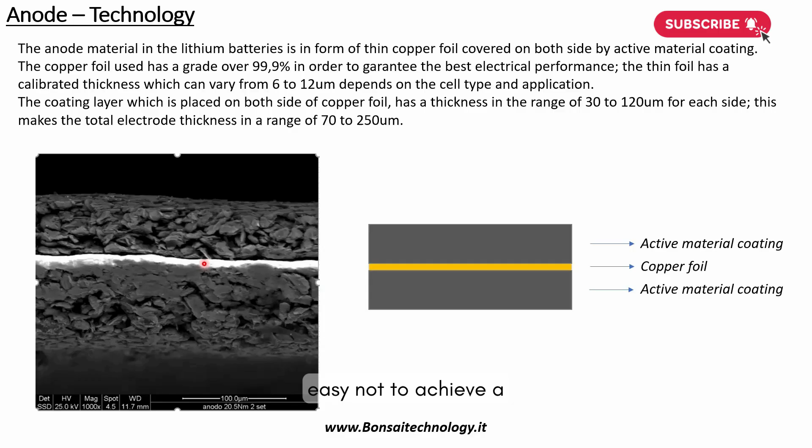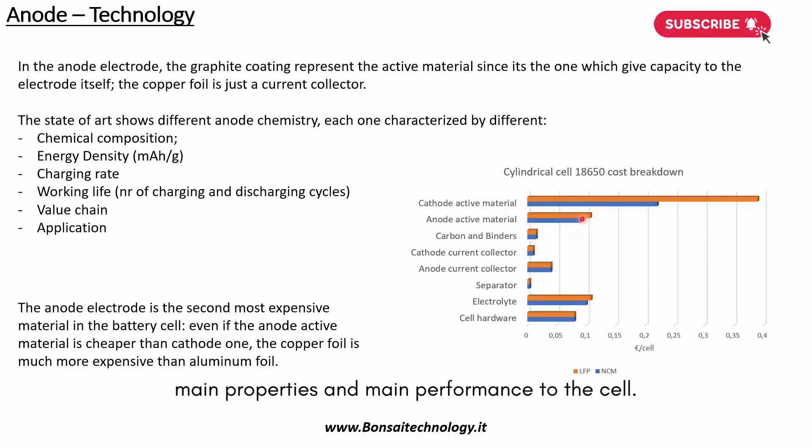The same that we said for the cathode still applies to the anode. So even for the anode, the main KPIs or main features are represented by the chemical composition, the energy density, the charging rate, working life, value chain, and application. As you can see, the anode represents the second most expensive material in the battery cell, and the anode with the cathode are the two materials that give the main properties and main performance to the cell.

So how does the anode work? In the beginning it seems difficult to understand, but it is really, really easy. As you know, the graphite structure is defined by basal planes. The graphite has a hexagonal reticulum arranged in a plane, so the graphite is composed of a stack of planes where the atoms lay on each plane.

So during the charging and discharging of the batteries, the lithium ion moves between the basal planes - the lithium ions are moving from plane A to plane B. And this increases the volume of the active material in the anode. The increasing volume creates many effects inside the battery cell once it's operating, because if there is no empty volume inside the case of the battery and the anode during the charging phase is increasing its volume, that means even the internal pressure increases.

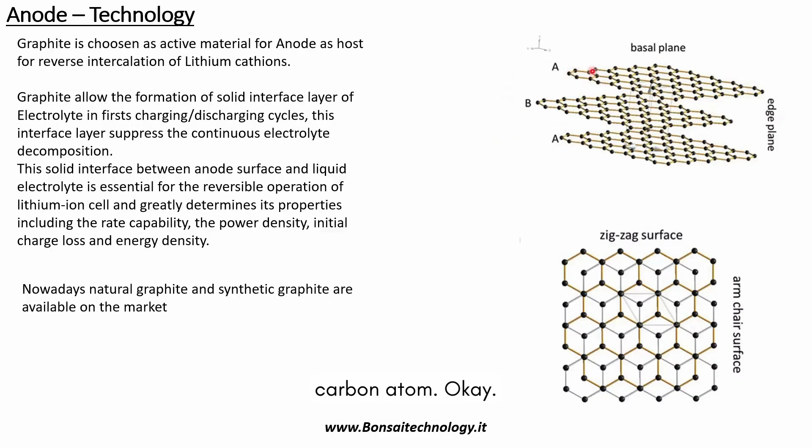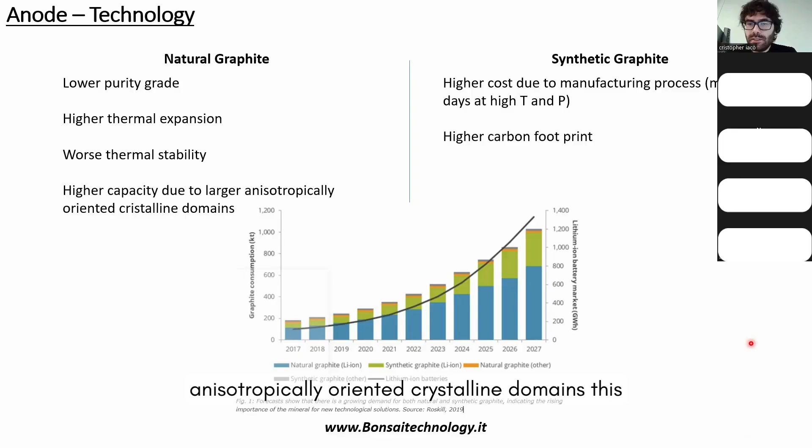And as mentioned before, we have two types of graphite: one is natural graphite, and the other is synthetic graphite. The natural graphite has a lower purity grade, but has a higher thermal expansion compared to synthetic graphite. And since it's natural, since it has a lower purity grade, it has a worse thermal stability, but has a higher capacity due to the larger anisotropically oriented crystalline domains. This is quite difficult to explain if you don't have some basics of material science.

Anisotropic is the feature of a material to have different mechanical and physical properties in different axes. So anisotropic materials have different behavior, depending on the plane or direction where we measure the property.

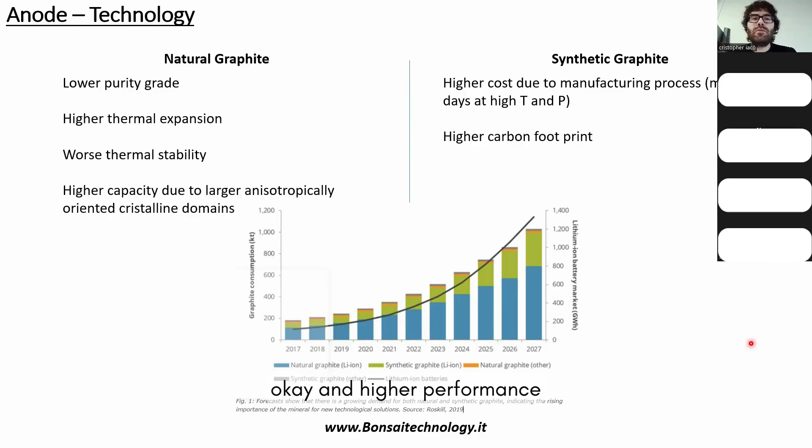Synthetic graphite is more expensive and has a higher carbon footprint, but for sure has higher performance in terms of stability and thermal expansion, so the thermal expansion is smaller.

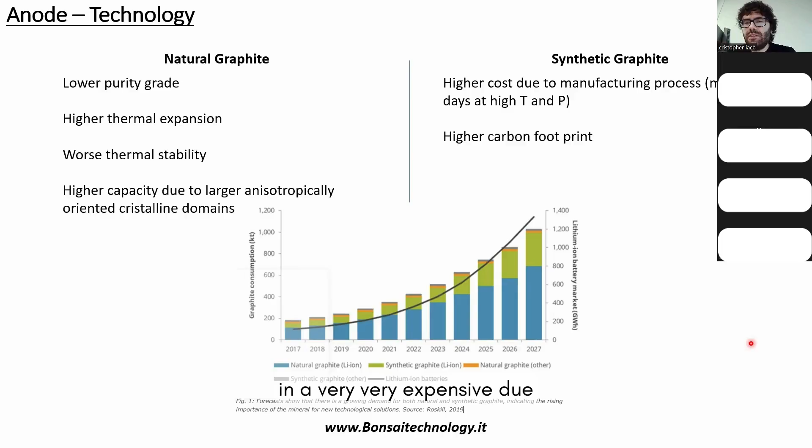I would like to spend some words on the higher cost due to the manufacturing process. Synthetic graphite is obtained through a very expensive manufacturing process, because to obtain the graphite, usually you start from carbon coke, and then you need to keep the compounds at very high temperature and very high pressure for several days. When I say very high temperature, I'm talking about 3,000 degrees Celsius.

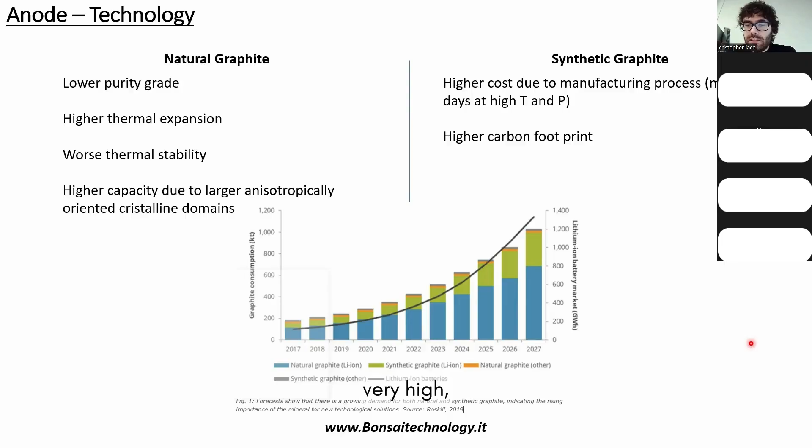This for sure will increase the cost, because the energy cost is very high in the last months and years, and even increase the carbon footprint.

The main problem is that compared to the cathode composition, the graphite is very cheap. That means the value of the graphite is quite negligible, so there's no interest to recycle the graphite.

And this could be a problem if this graphite is synthetic, because it increases a lot the carbon footprint. It's a minor problem for natural graphite, but at the end this will have an impact on the overall carbon footprint during the battery life cycle.

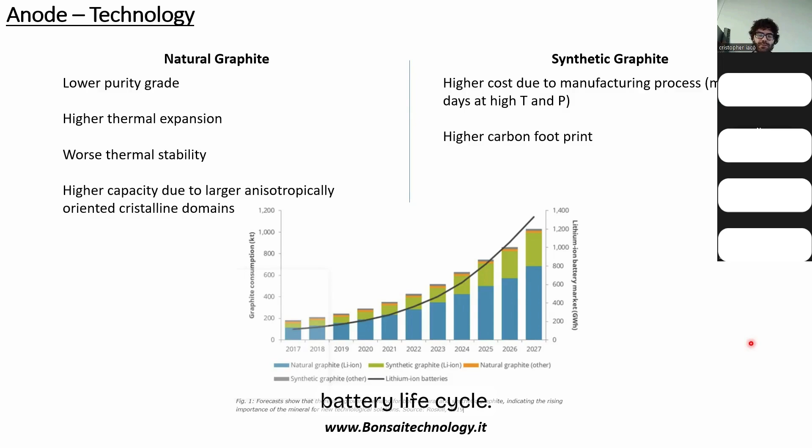If we check the plots, the plot on the bottom side, you can see that the demand for natural graphite is going to increase, but even the demand for synthetic graphite is going to increase. And for sure, natural graphite will represent the main graphite compound, or the main solution, for lithium-ion batteries.

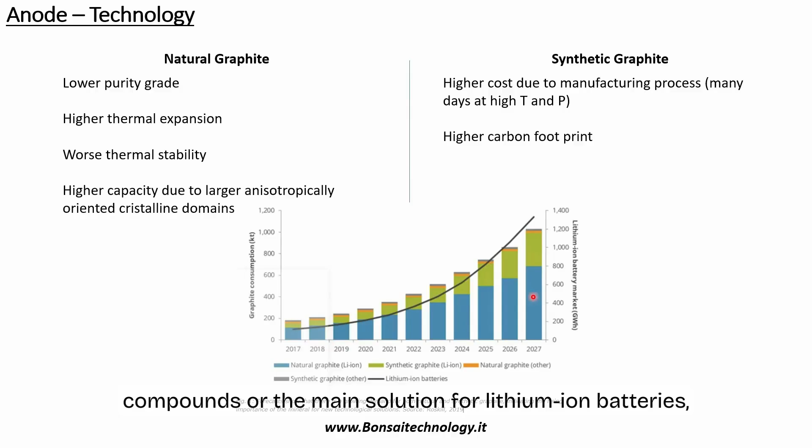I think for lower cost, and since the way to obtain graphite in natural form is very easy, the availability is very high. Some people try to compensate for the lack of availability with synthetic graphite, but just for very technological applications or designs, I don't see many reasons to move to synthetic graphite, at least until there's interest in recycling.

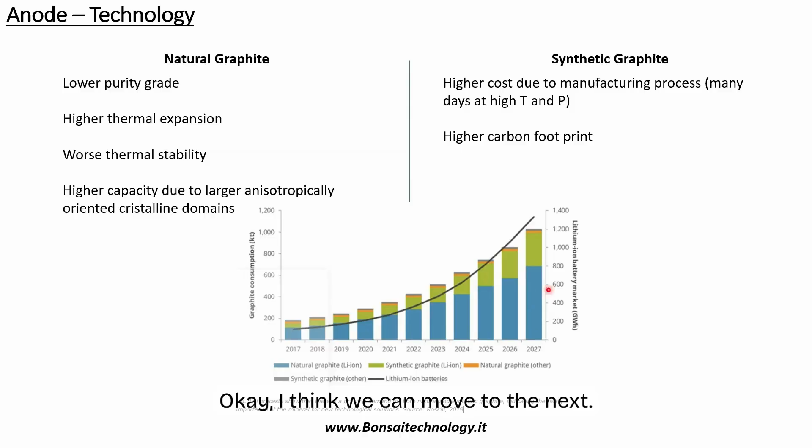I think we can move to the next topic: anode. Right now we can talk about anode market trends. As mentioned before, the trend is to introduce silicon into the anode chemistry.

This increases the charging speed, decreases the charging time, and even allows an increase in energy density. It's a very good innovation.

Some players are already using this in their batteries. One is Tesla, and you can see some articles on websites. Many other players are going to adopt this kind of solution in terms of silicon anode batteries. As you can see, the trend is to have a bigger, higher demand for silicon-based anode material in the next years.

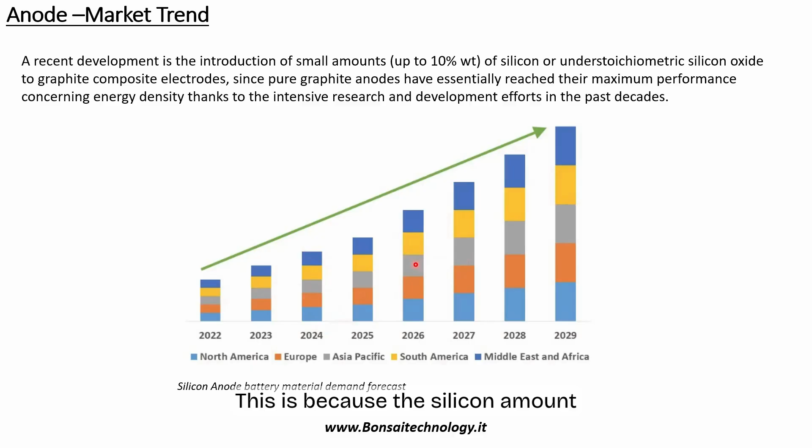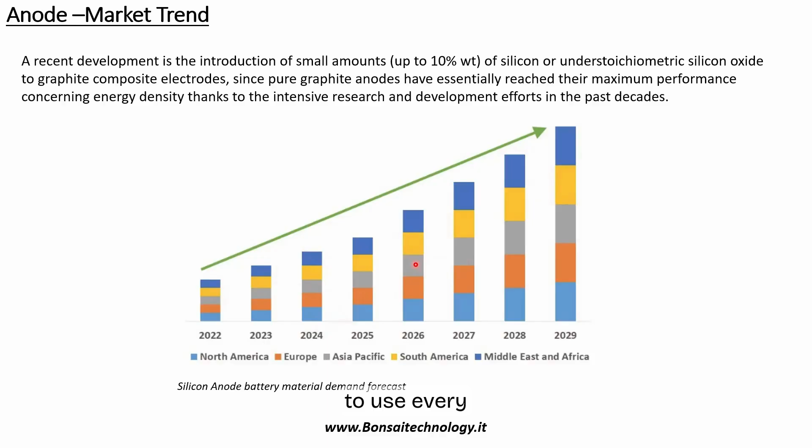This is because the silicon amount is very small, up to 10% in weight basis, and the silicon cost is not high, but the benefits are huge. This explains the trend to use more silicon-based anode material every year.

Right now we can move to the separator, which is the third most important element of the battery cell. The separator is what we see here, the white membrane. This one is very, very smooth.

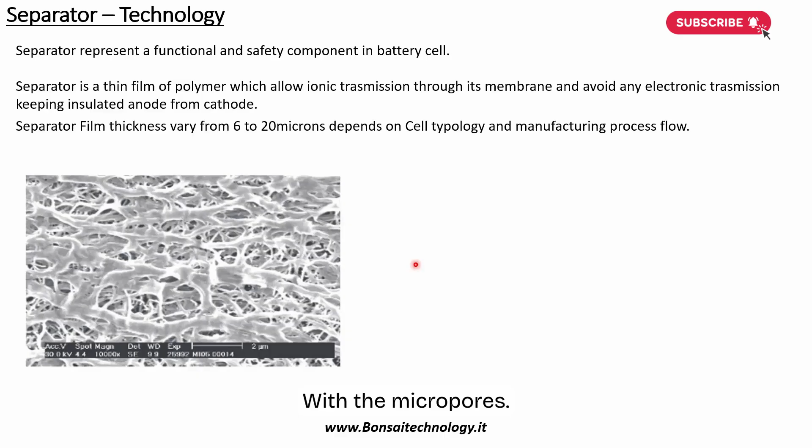There is another one, for example, that is very porous. For sure you cannot see the pores with your eyes, but the feeling with your hands, the touch, is different. So the separator is a very thin film of polymer, usually polypropylene or polyethylene, with micropores.

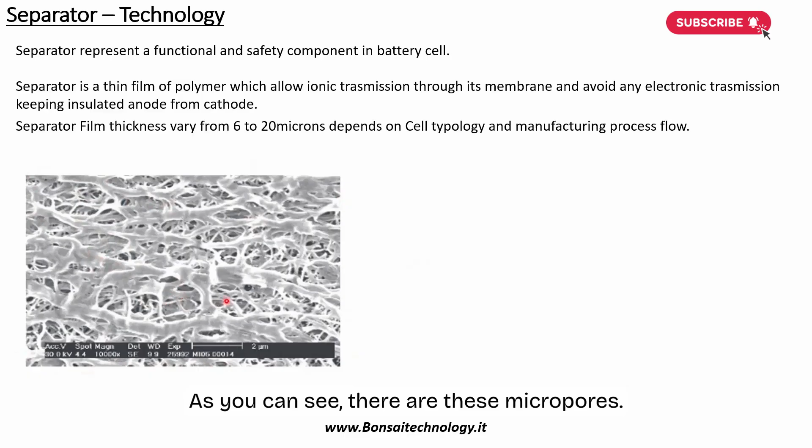Again, as we've done for anode and cathode, on the left side you can see a SEM microscope picture of the separator, where you can get a very clear idea about its structure. As you can see, there are these micropores, and the size distribution and average dimension of the pore represent one of the most important KPIs for separator performance.

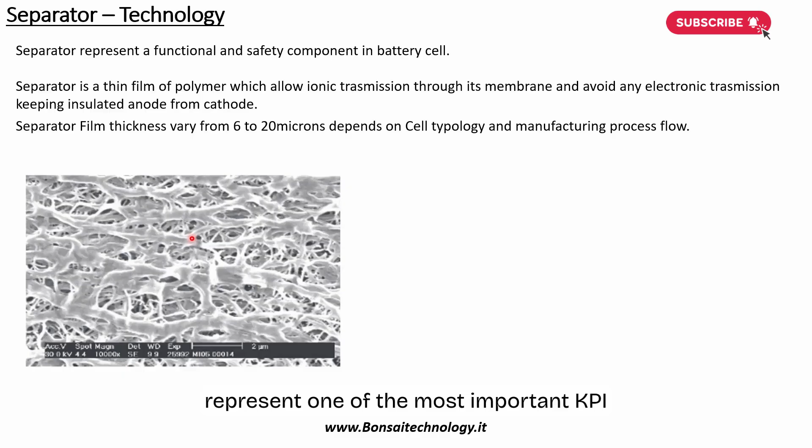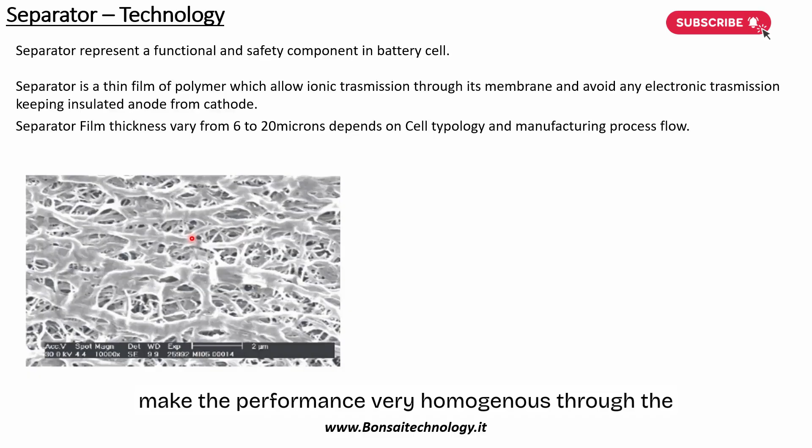There are some new startups in Asia that found strategies to produce a separator with very controlled and homogeneous pore size, and this for sure increases the battery cell performance, making it very homogeneous through the entire battery cell. The problem, for sure, is the scalability from lab scale to mass production scale, and we'll see what happens in terms of cost.

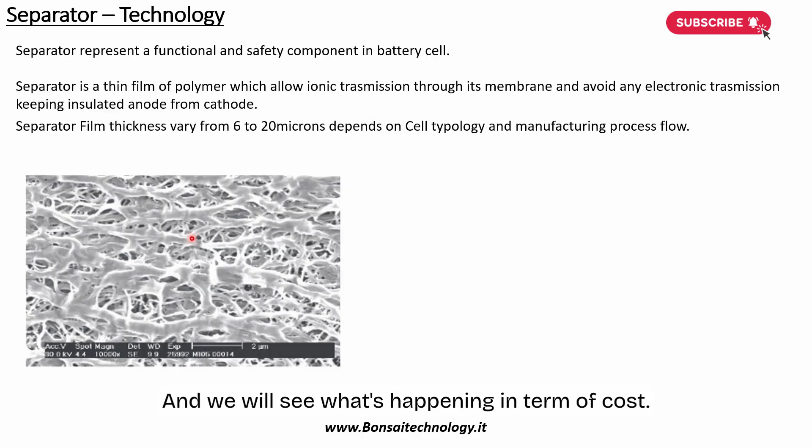The separator film has a very thin thickness, from 6 to 20 microns. The thickness mainly depends on the manufacturing process. For cylindrical cells like this, the separator is very thin, around 6 or 9 microns. In some cases, somebody uses 12 microns.

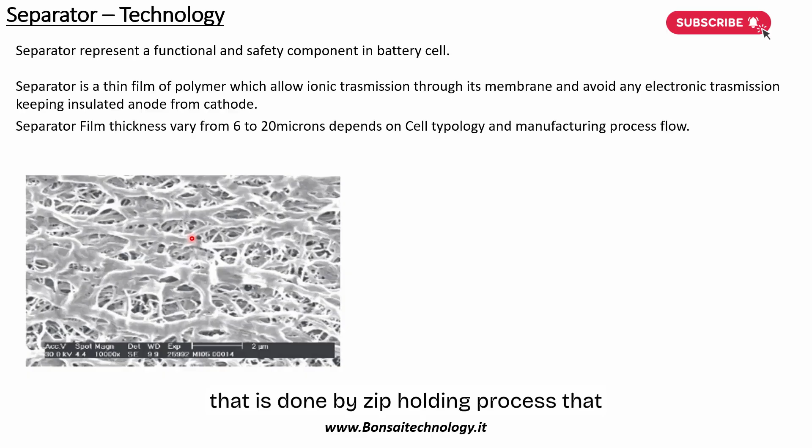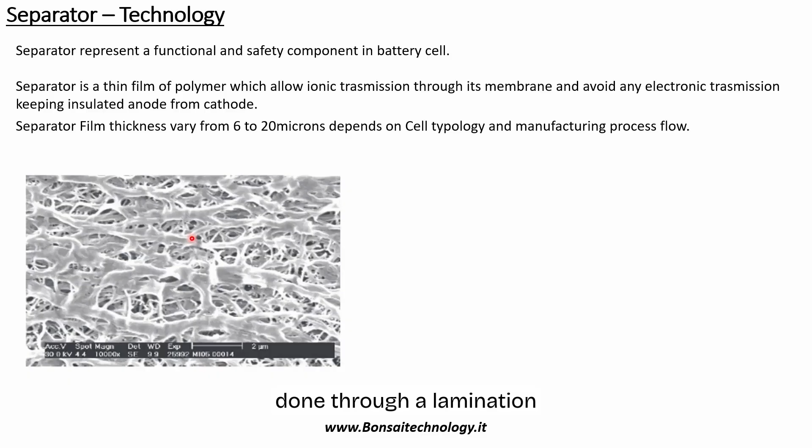For this kind of prismatic cell, that is done by a Z-folding process that we'll see later on. Here the separator could be very thin, even 12 microns or 9 microns. For this kind of battery, pouch battery, that is done through a lamination process, the separator must be quite thick, so we're talking about 15, 20 microns.

The reason is that during this manufacturing process, there are some processes that stress the separator material a lot. The risk of using thinner separator material is having some internal short circuit during the working life of the battery.

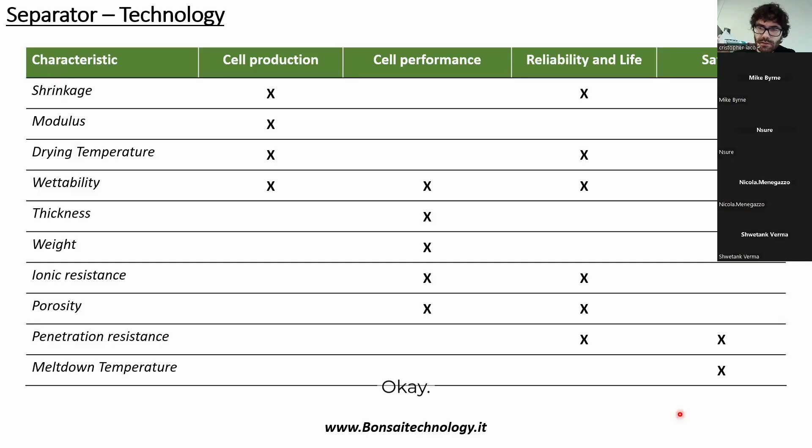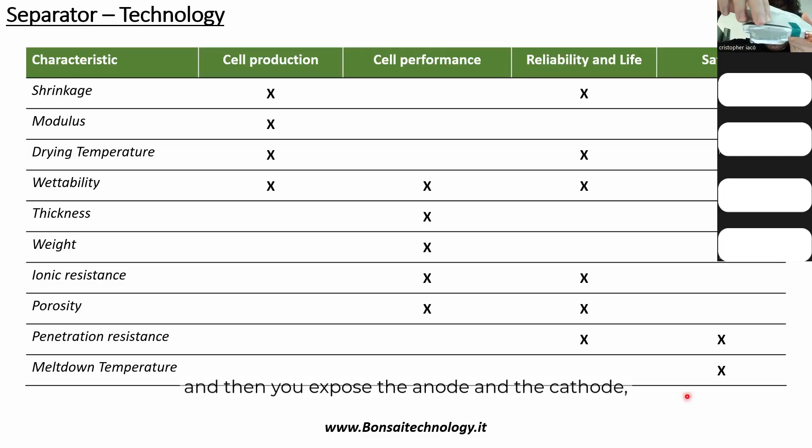The shrinkage feature must be taken into consideration for cell production, for reliability and life, and for safety, because if my separator tends to have a shrinkage effect, that means inside the battery, you can uncover the anode with the cathode - maybe the separator undergoes some shrinkage, and then you expose the anode and the cathode, and you can create a short circuit, and this is not good for the battery.

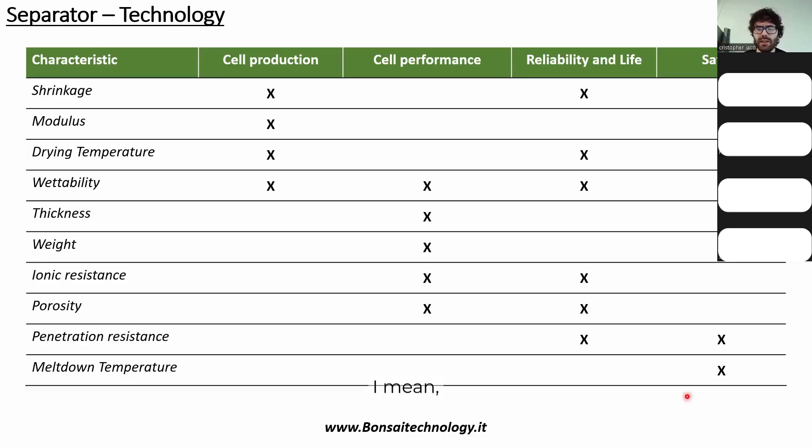But this can even affect the cell production, because the shrinkage effect could occur during the drying process, or during other processes where the cell goes through very high temperature processing. In this case, the separator can suffer shrinkage and then create some problem in the downstream area of production.

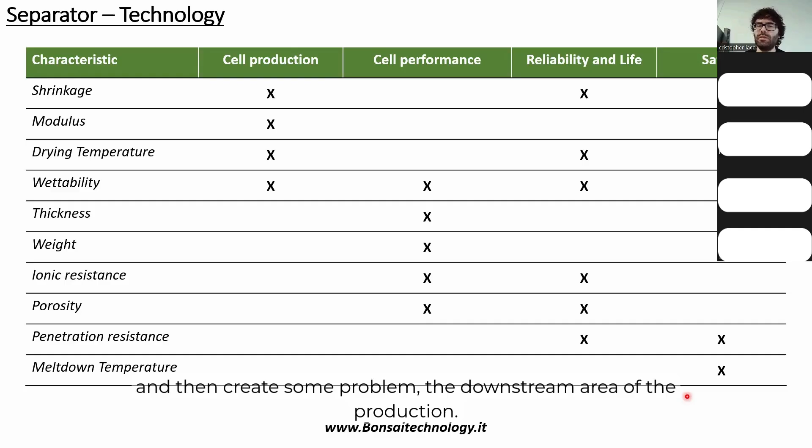The modulus, we already mentioned before, can affect cell production, because in some manufacturing processes I need to apply tension to the separator. Very high modulus can keep the separator properties very homogeneous. Not high modulus separators are not able to keep the separator properties homogeneous.

The drying temperature is another important KPI for cell production, even for reliability and life, because if the separator cannot be dried at high temperature, this creates some shrinkage. This maybe triggers the shutdown effect, and can even create degradation of the separator itself. So since the separator should be dry for cell manufacturing, it's important to consider the drying temperature with the characteristic temperatures of the separator.

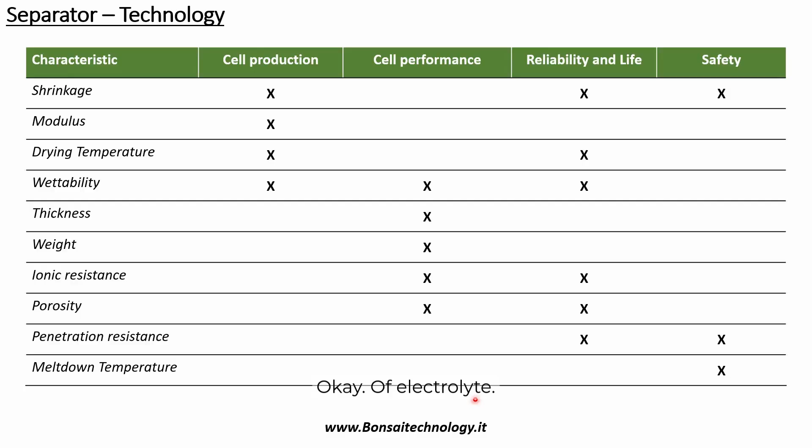Then we move to wettability, that is important for quite everything except safety. So it's important for cell production, cell performance, reliability, and life. The wettability is the capacity of the separator to be wet by the electrolyte. The electrolyte goes into the separator porosity. If the separator is wet completely and in a homogeneous way by electrolyte, during the formation that we see later on, we will have a very thin and homogeneous solid interface layer of electrolyte. This allows very homogeneous performance through the battery cell, and even a reliable product, because we can measure the performance during the working life and understand what happened.

Thickness in terms of cell performance, but we can say that it can affect even safety for the reason I mentioned before. The weight, again, mainly affects cell performance, because weight and thickness are in some way correlated. If the thickness of the separator is very, very high, this can decrease the overall volumetric energy density of the battery cell. On the other side, if the weight is very high, this can decrease the gravimetric energy density of the cell.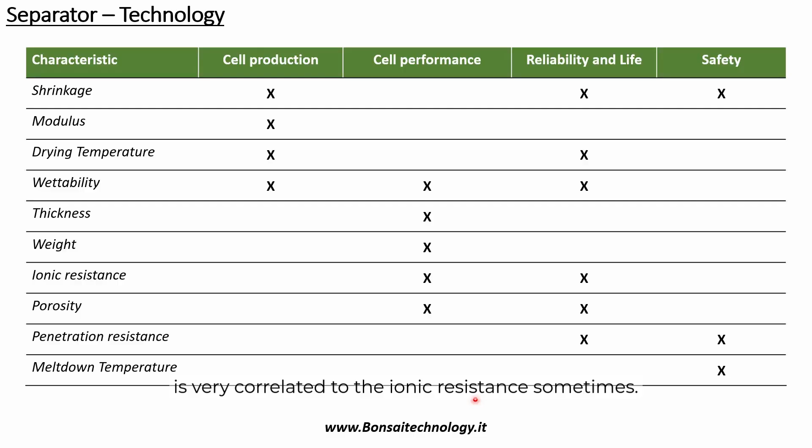The ionic resistance affects cell performance because the resistance to lithium ion flow affects the performance. With high ionic resistance, ions cannot pass through the separator very easily and quickly, so we cannot have a power battery cell, but maybe in this case we talk about an energy battery cell. Very high ionic resistance can even increase the temperature inside the battery cell during the working life. And again, porosity is very correlated to ionic resistance sometimes, as we spoke about before.

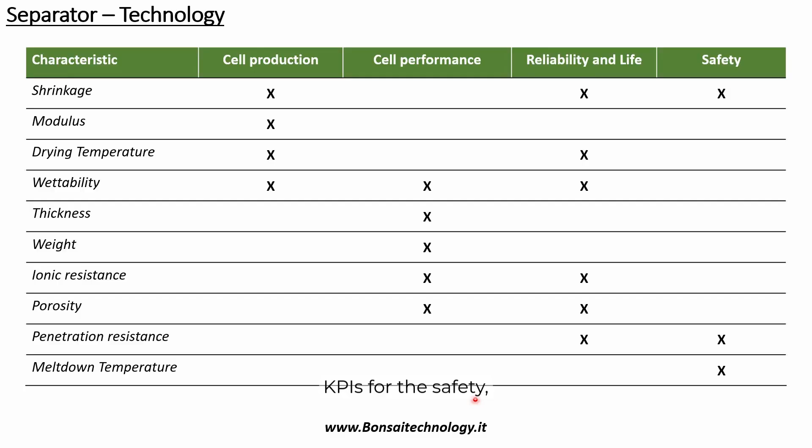Then we have the penetration resistance and meltdown temperature, two important KPIs for safety, for the reason I mentioned before. Let me come back to the previous slide to explain a little bit more about the puncture strength.

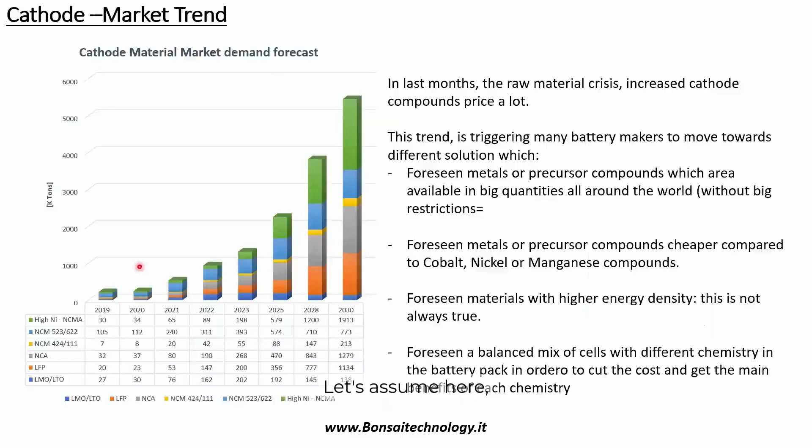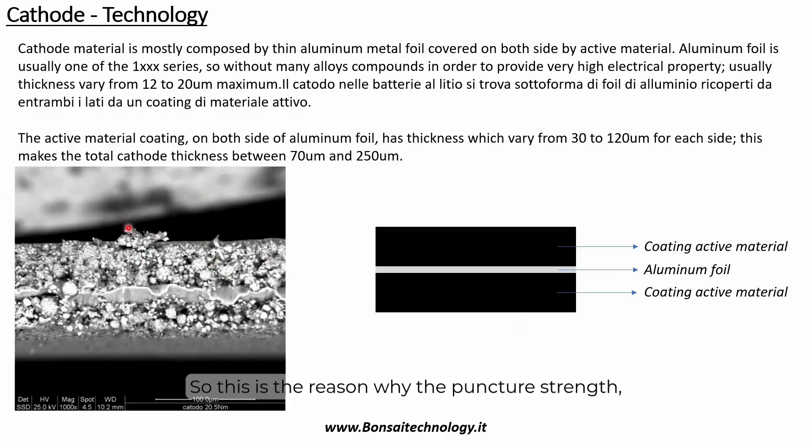Let's assume here, this is a cross section of the cathode. Let's assume that one of these particles remains on the cathode surface through the entire manufacturing process. At the end of the manufacturing process, over this cathode surface will be a separator layer, and over this separator layer will be an anode, then separator, cathode, separator, anode, and so on, everything stacked and compressed to each other. So this particle, a coating particle, applies a certain local pressure on the separator with a certain force. If this force is enough to pass through the separator, this cathode will be in touch with the anode on the other side of the separator, and this creates a short circuit. These are very, very bad things, because this can start the degradation effect, the thermal runaway, and your battery can catch fire.

So this is the reason why the puncture strength is very important. Here there is an explanation about what we talked about before.

I forgot to mention about the ceramic coating. Usually the separator, in order to increase their electrical resistance, is covered on both sides or just one side with a ceramic coating that is usually alumina, aluminum oxide. This for sure increases a lot the electrical insulation of the separator, so increases the safety, and doesn't have a lot of effect in terms of ionic resistance. But it does increase the cost of the separator, because instead of just having a pure polymer film, you need to add even the ceramic coating, which is a very, very thin layer, something like one micron or maybe less. That for sure increases the price, increases the complexity of manufacturing, but increases the safety. We can say that 95% of cell makers are currently using separators with ceramic coating, at least on one side of the separator membrane.

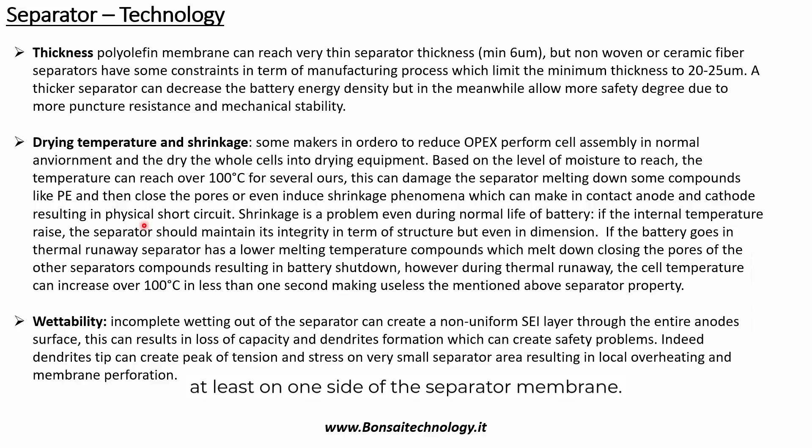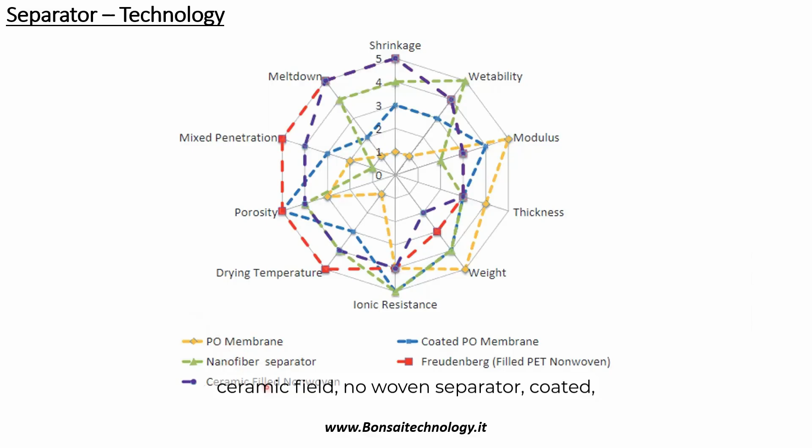Okay, here there is a slide that represents the performance of different separators. There is the polyolefin membrane like PP and PE, nanofiber separator, ceramic filled non-woven separator, and coated PO membrane, that is the case of polypropylene and polyethylene with ceramic coating.

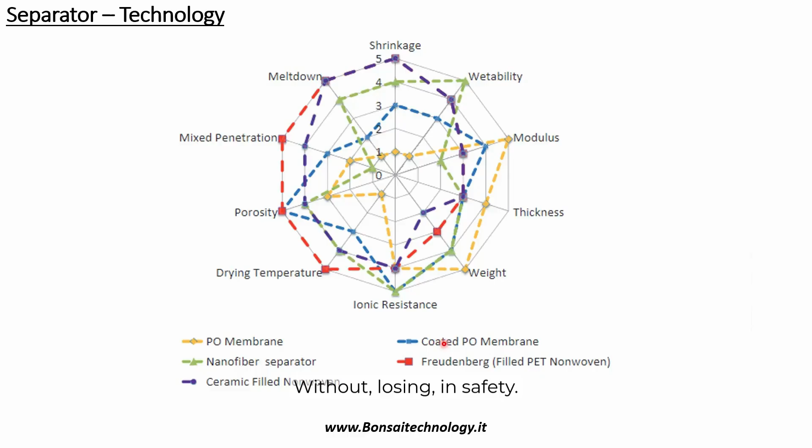If we focus on the yellow and blue lines, we can see that we have high porosity for the polyolefin membrane coated by ceramic coating. The reason is that separator makers can allow bigger pore size without losing safety, because the ceramic coating increases the electrical insulation.

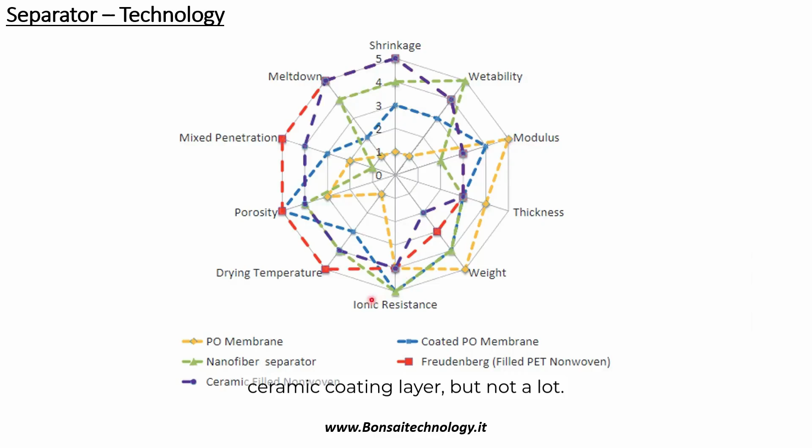As mentioned before, this doesn't change the ionic resistance much. I mean, it does increase the ionic resistance a little bit due to the ceramic coating layer, but not a lot, and more or less it has the same properties.

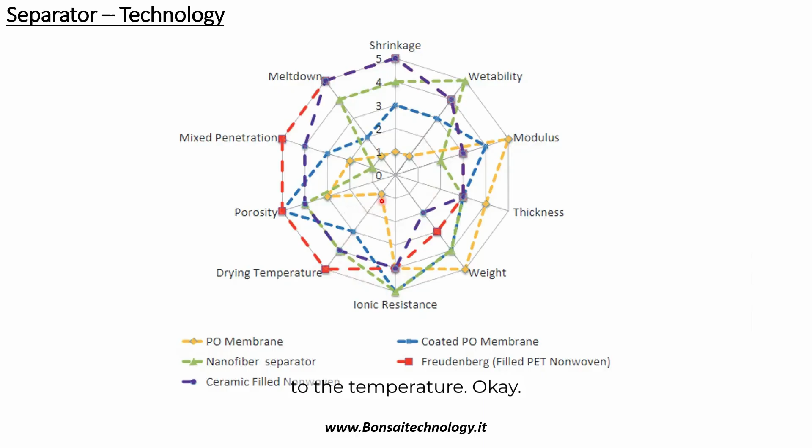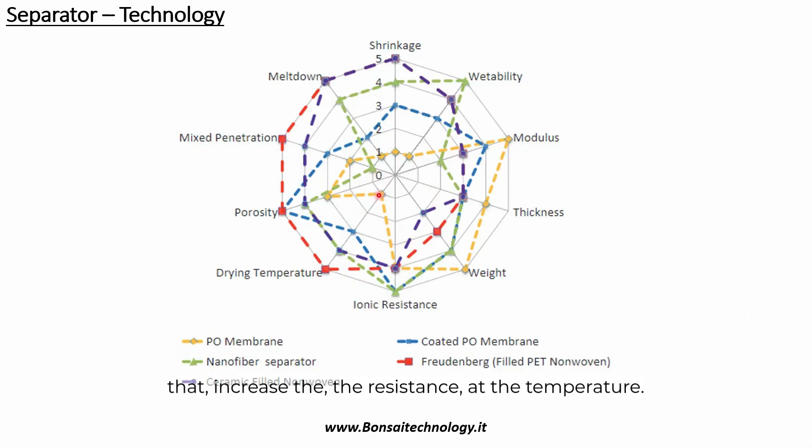The main problem of the polyolefin membrane without ceramic coating is that it's very sensitive to temperature. As you can see, the score for shrinkage, meltdown, and drying temperature is very, very low, and the reason is because there is no ceramic coating layer to increase the resistance to temperature. This is why many players are moving from PO membrane without ceramic coating to PO membrane with ceramic coating.

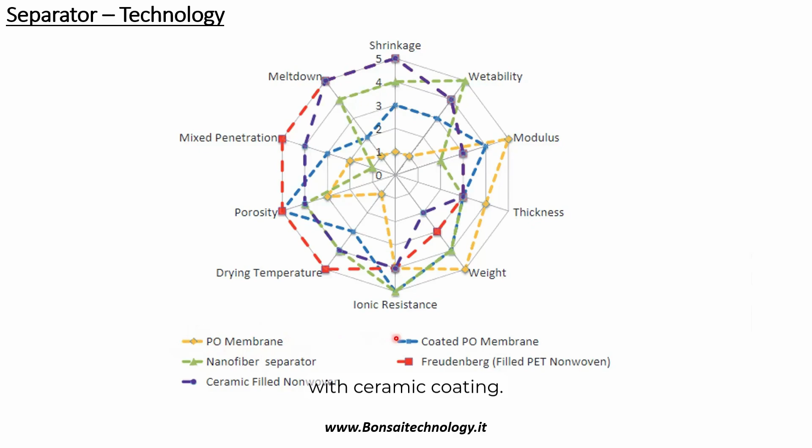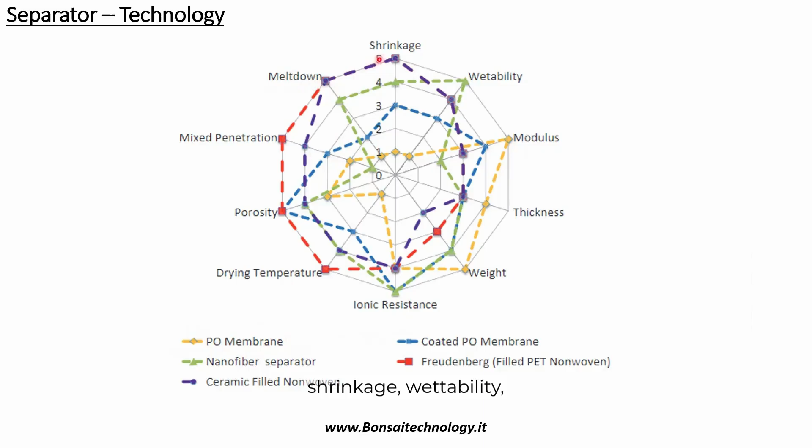Currently, there are some studies regarding the non-woven and nanofiber separators. As you can see, non-woven and nanofiber separators have very great properties in terms of meltdown, shrinkage, wettability, good property in terms of ionic resistance, and even for the other KPIs.

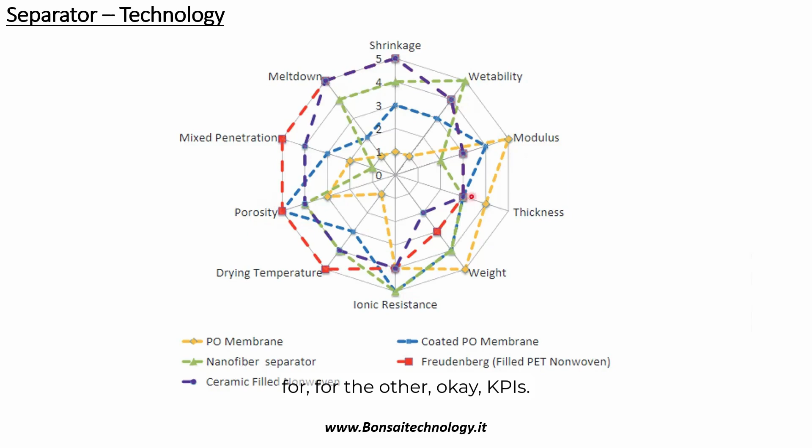The problem is that it seems not possible to achieve very thin thickness and very light separator for non-woven and nanofiber. This is the reason the score is lower compared to the PO membrane, but quite similar to the coated PO membrane. Anyway, based on some studies, it seems still quite difficult to obtain the nanofiber and non-woven separator in a very cheap way for mass production.

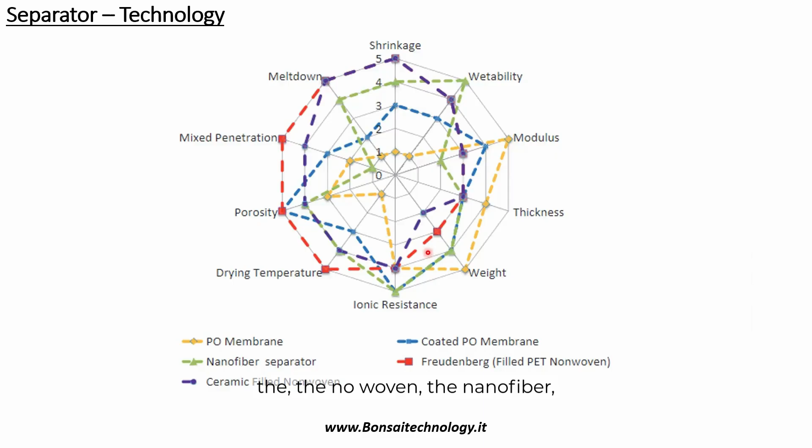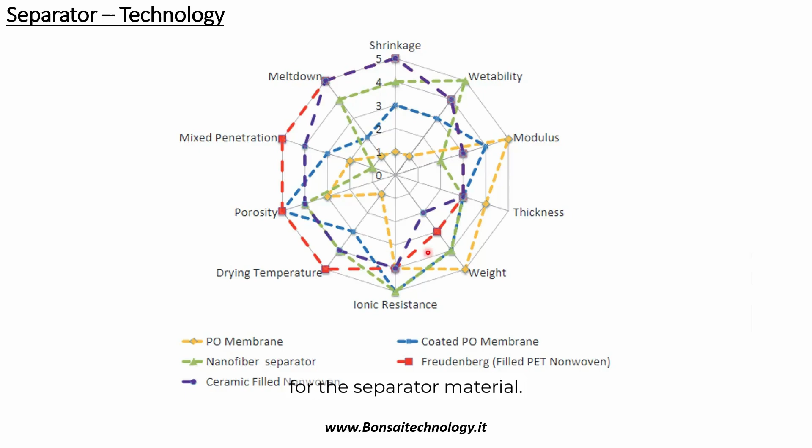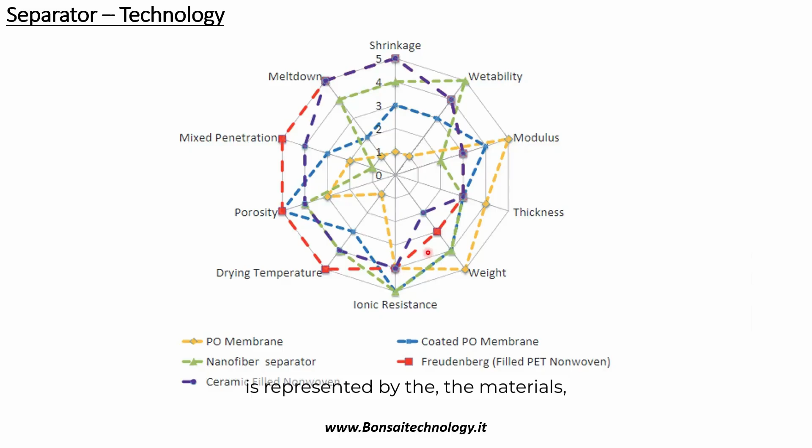But I think the reason is just because we are in the early stage of development. So non-woven and nanofiber could be the next generation of separator, having all the features to be a very successful idea for separator material. The problem is just the manufacturing cost. As you know, one of the targets is to decrease the cost per kilowatt hour, and mainly the cost is represented by the materials of the battery cells—anode, cathode, separators, and so on.

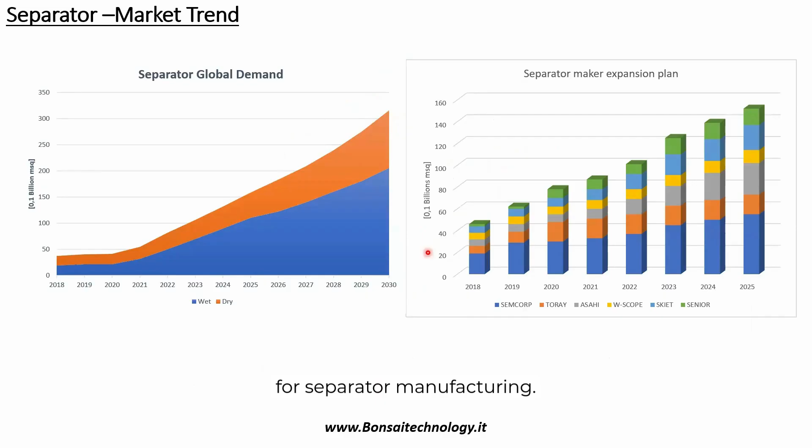In terms of global separator demand, it's quite obvious the separator demand is going to increase very, very rapidly with the lithium-ion battery demand. There are not many companies for separator manufacturing—most of them are in Korea and China, so Asian companies. The main ones are Semcorp, Toray, Asahi, Skiet, and Senior.

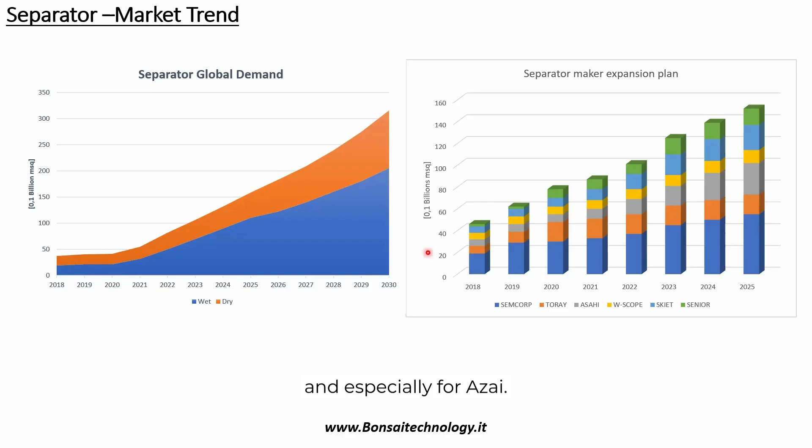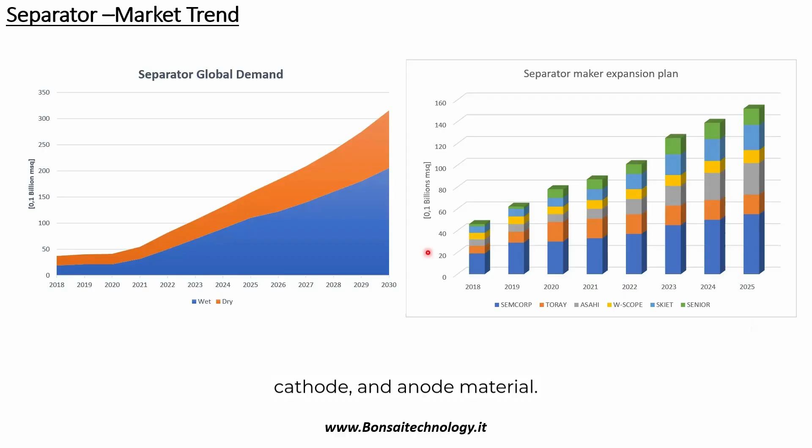Toray, Asahi, and Semcorp are the ones most used by the main battery makers, and even for them there are some expansion plans, especially for Toray and Asahi. Semcorp is going to invest some billions, but not like Toray and Asahi. Again, the trend is the same as for the cathode and anode materials.

Then we have the electrolyte. As mentioned before, the electrolyte is a mix of lithium salts and organic compounds. The lithium salts dissolve in the organic compounds, and dissolving releases the lithium ions that are able to flow through the separator. The electrolytes have some KPIs as well.